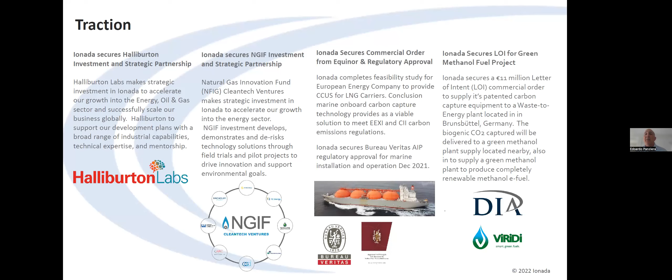But we also have other groups, including renewable fuels, where we use, for example, direct air capture, as well as other technologies to produce renewable e-fuels. But today's presentation, we're going to focus on onboard marine carbon capture. We're just going to quickly touch on the marine regulations. I think everyone's familiar with it. We know that they're driving the change in the industry. We'll talk about the market drivers, why carbon capture on board makes sense for the marine industry.

I'm going to introduce our technology, our unique patented technology, which is hollow fiber membrane contactors. That's a technology we developed initially for marine for desulfurization, and now we're able to use that same technology platform for carbon capture. That allows us to definitely leapfrog many of our competitors and have a mature technology that'll be ready for the onboard marine carbon capture market.

We're going to go into two case studies. The first is with short sea shipping, coastal vessels, where it makes a lot of sense. And Nikos alluded to that. One of the issues we have is with storage on board. So for shorter sailings, it makes sense. And then we're going to talk about LNG carriers, where the energy balance, and obviously with steam-driven ones, the high CO2 emissions have a very quick payback in that case.

And then I'll provide some references as well on projects we've worked on in the past in terms of developing the technology. Why we're here today, we're here obviously to talk about the greenhouse gas emissions. We've all collectively agreed we're going to reduce those emissions by 50%. The switch to renewables is not enough, especially for industries that are difficult to abate, such as the marine industry. If we try to electrify a vessel that goes from Shanghai to California, the battery pack would be larger than the cargo hold. And that's a big challenge, not just with electrification, but with hydrogen and ammonia.

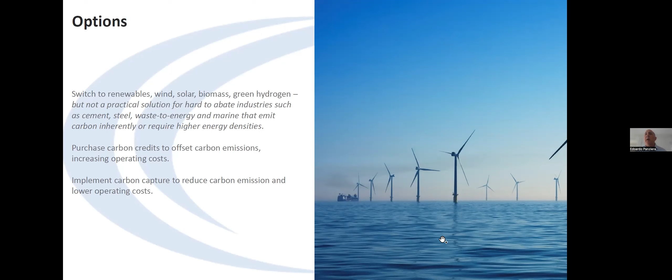Ship owners have two choices. They can either install some sort of onboard carbon capture or pay increasing carbon taxes. And today's presentation will focus on how onboard carbon capture can help reduce your compliance costs. We see carbon capture as part of a whole plethora of unique tools available to the ship owner.

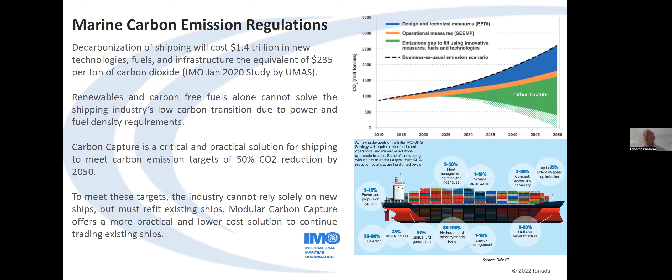There are improvements, and many of the ship owners have already implemented these reductions. For example, speed reductions to reduce greenhouse gas emissions, hull coatings. These are all great, but they're going to get us about 15 to 20% of the way there. If we're going to hit our 50% targets, we believe you need some sort of onboard carbon capture. And that's what we're going to talk about today. Obviously, the legislation is driving this. It's ever changing. I won't get involved in that, but there is a history of these changes.

But what's unique about this industry now, I was also in the desulfurization industry. Desulfurization was really driven by the fuel costs. In this case, it is the Poseidon principles and the charterers. Companies like Cargill, ADM have all made pledges to carbon reduction. And now they're turning to the ship owners and asking, what are you going to do about reaching our target objectives? So it's really driven by the charterers, not necessarily by the ship owners.

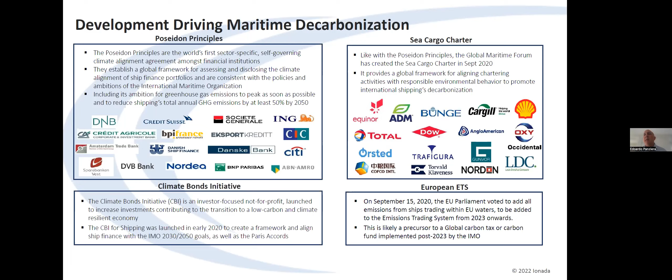And what we see emerging is, obviously, as the technology emerges, our technology and our competitors', the cost of carbon capture continues to fall. We also see, through the EU ETS and other global taxation, the cost of carbon pricing increasing.

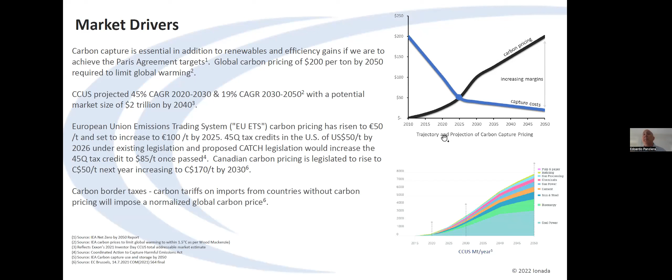Vessels that trade within the EU are going to be included in the EU ETS, and that's going to have a significant impact on the operations. And when the carbon pricing exceeds that of the carbon capture cost, we see a break-even point. So our vision or anticipation is within the next 5 to 10 years, we're going to see an inflection point where it makes a cost-effective business case to be able to do carbon capture on board. And this represents a $2 trillion market potential for carbon capture.

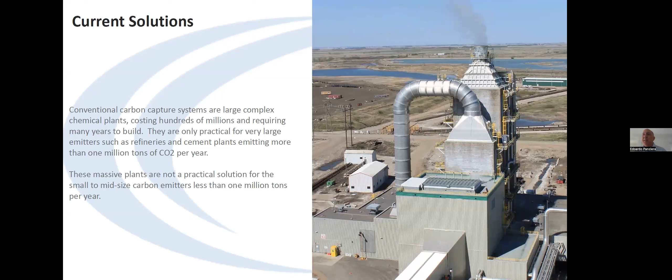Our competitors' technology, people who are familiar with carbon capture know these are very large facilities. They're typically doing 1 million tons and above of CO2 per year. They're $200-300 million. They take about 8 years to build. It's simply not a practical solution to have a 35-meter tower installed on the aft of the vessel. These typical towers need to be plus or minus 1.5 degrees, and that's not very applicable for marine application.

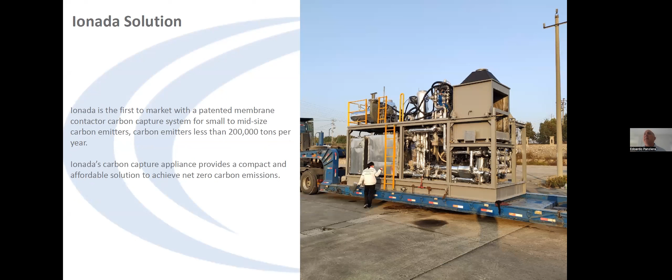In contrast, our technology, hollow fiber membrane contactors, allows us to shrink the technology down and marinize it. On the right here, we have an example of a small scale EOR carbon capture system. It's 500 kilowatts, but does show you how small it can get. This is for China Oil Field Services for offshore application, but does show you how small the technology can be compared to conventional carbon capture systems.

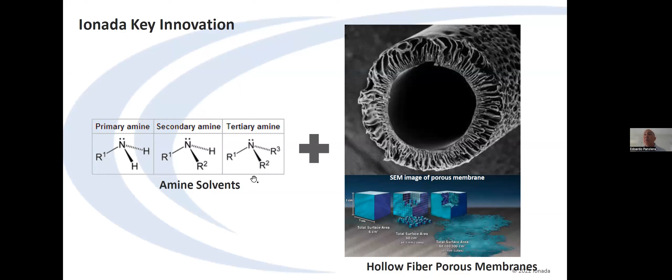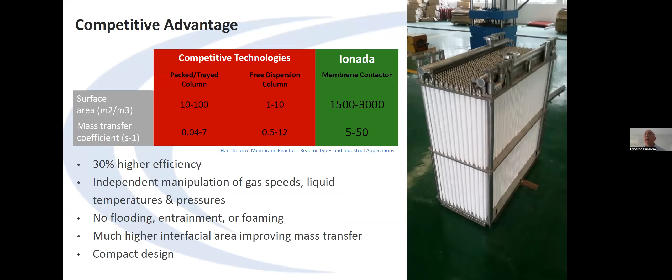Key here, I'm not going to focus on the technology, is we have these hollow fiber membrane contactors. They have a very high TRL level. We combine that with proven amine solvents. They've been in the business for 70 years of doing carbon capture. The key here is we have a very high surface area per unit volume. This allows us to shrink the size of the absorber, gets rid of a lot of moving components, and turns the carbon capture from a chemical plant into an appliance you can plug into your engine and filter out the CO2.

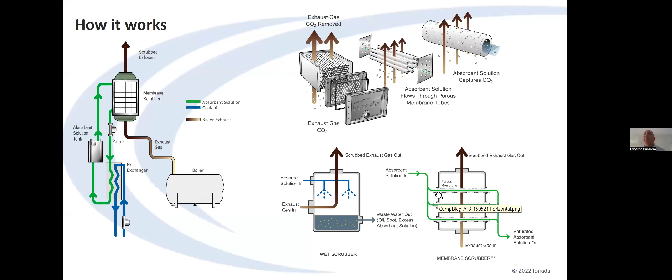How it differs fundamentally is wet technology, for example, wet scrubbers or packed beds, spray or atomize those solvents. Instead, we use these membranes to be able to capture and sequester that CO2. That's a very key attribute to our technology. The process flow diagram is quite simple. We take the exhaust gases, we pass it through the absorber. This is a regenerable process. We load up these amines, we strip out the CO2, and then we can store it as a liquid on board.

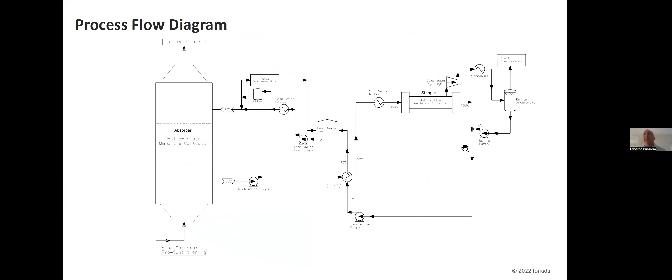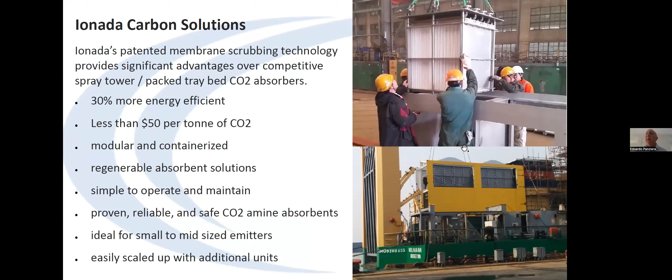What that means for our technology is more efficiency. That reduces the cost of carbon capture. We're able to modularize and containerize the system, which allows us to really quickly deploy it on a vessel, reducing the dry dock and retrofit costs. And we're using proven reliable solvents. Our technology has been proven initially for desulfurization. Now we're applying it to carbon capture.

What does this look like? This is our standardized modular system, 20,000 tons per year. That corresponds to about 85 to 90% carbon capture on a 4 megawatt engine. We're going to see an example later on for short sea shipping, where one of these arrays of 3 40-foot high cube containers is able to capture up to 85 to 90% of the CO2. It consists basically of an absorber, so the exhaust gases from the main engine pass over the absorber. We have a stripper that strips out the CO2, and then we compress and store the CO2 on board. I haven't shown the CO2 tanks because obviously that will differ on the application.

But the key here is that these 3 40-foot high cube containers could do 25% of a 16 megawatt engine. Why would you want to do 25%? Well, if you need to achieve an EEXI or improve your CII rating by, let's say, 20%, then one of these units on a 16 megawatt engine would be able to get you compliance. If you want to do 85 to 90% carbon capture, you would have 4 of these units. That modularity allows us to scale up quickly to do anything from 4 to 16 megawatts. The OPEX will vary. We have here basically $18 to $46 per ton, and we'll explain that in detail, but it's about a 5% increase in your fuel consumption.

So if you're running this system just like a wet scrubber, you have an increase in engine load, and that corresponds to about 5% penalty. But if you look at the cost, for example, at 100 euros a ton, you're disposing the CO2 for 30 euros a ton, there's a 70 euro delta, and that's the payback, and that's the business model. And this typical unit uses about 400 kilowatts, and that's to run the compression system. So it's a quick note on the carbon capture technology itself.

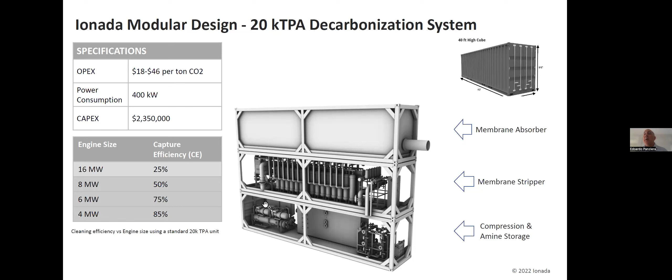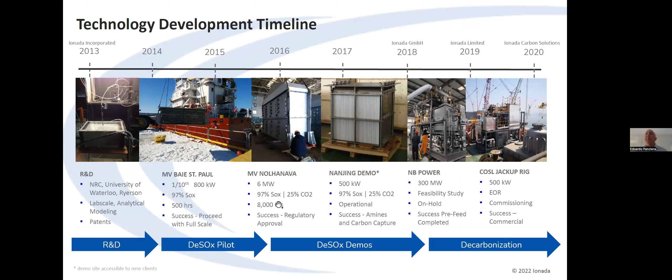Company itself, as I mentioned, we developed the technology. We have Bureau Veritas approval initially for desulfurization technology, and now for the carbon capture version. We've run over 8,000 hours of the membranes on a ro-ro vessel, the Nolhanava, and this gives us a proven platform to be able to launch into carbon capture for marine vessels. We have a broad patent portfolio that protects the technology as well.

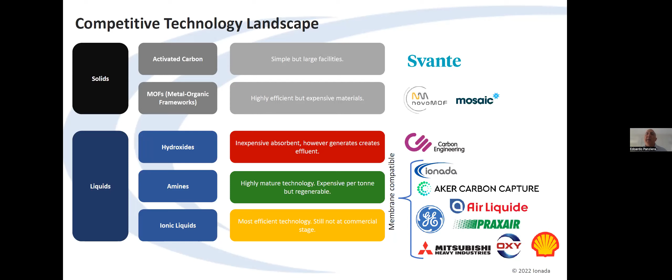We're not alone. There are many competitors on the market. Many of you are aware of companies like Mitsubishi, Air Liquide, Oxy, Aker Carbon Capture. But our key differential here is that the Ionada membrane technology, which is modular, the key challenge there is we double the size, we double the cost. And there's a break-even point, about 200,000 to 500,000 tons per year, where you're better to have a customized, tailor-made solution using traditional carbon capture systems.

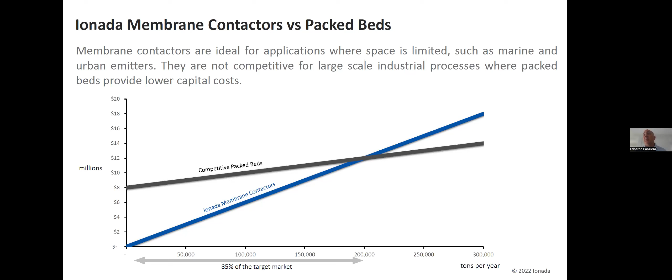But for marine vessels, they're all well below 200,000. That corresponds to about over 100 megawatts. Most marine vessels are between 20,000 to 100,000 tons per year. So definitely an advantage for our technology. It's also a much smaller scale, which makes it much easier to deploy on the vessel. So how we position the technology is we have the highest rate of return and lowest CapEx in the sub-200,000 market, which is what the marine sector is.

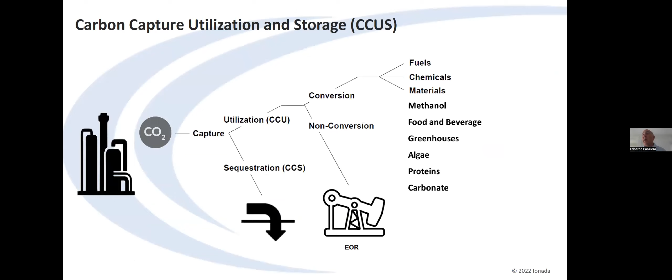One question that often comes up is, what do you do with the CO2 once you've captured it? We're going to talk about hub and clusters for sequestration. In the US and Canada, we look at EOR, but we also have an emerging market where we take the CO2 that's captured and produce renewable natural gas or methanol. So that's a key advantage to carbon capture, is there's a future value on that CO2.

The Northern Lights is a great example where we see the hub and clusters being built out. You have these anchor tenants such as Norcem that are building out this massive infrastructure for CO2 and CO2 transportation. Well, this allows us, for example, for marine industry to be able to leverage these infrastructures, be able to then offload the CO2 into this pipeline network. And this allows vessels that come to shore, for example, the Porthos project in Rotterdam, any vessels trading into Rotterdam would be able to unload the CO2.

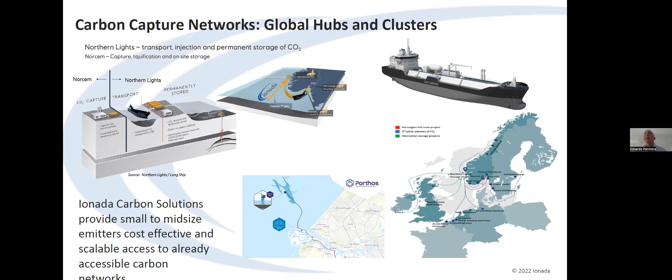And that's a key parameter we need to look at in terms of adoption. As the land-based systems build out this highway of CO2, the marine industry will be able to take advantage of that as well to dispose of the CO2. But let's get into specifics here and look at some examples.

The first is with Grona Shipping. It's a short sea shipping. They deliver wood pellets from Eastern Europe to Copenhagen. In Copenhagen, they run, for example, a biofuel power generation. So that's net zero, their energy production, but the transportation is not. So they're willing to pay a premium for the transportation of low carbon or zero carbon. They've already looked at LNG as a way of getting 20 to 25% CO2 reduction.

And now with carbon capture on board, we'll be able to achieve 100% net zero transportation. And that's really something that a charterer, in this case the power generation, wants to pay for. They're providing higher charter rates, longer terms. The financing itself qualifies for EU financing at 2.8% over 7 years. And that's a significant advantage that shifts the economics from being, let's say, 5 years in the future to being economically sound today, because the charterer is willing to pay a higher premium for that application.

In this case, it's about 3 to 4 megawatts, and we're able to do 85 to 90% carbon capture on board. We received our approval in principle for the project in December of 2021. And this project is a great example where the vessel only sails for 3 or 4 days.

So we're able to store the CO2 on ISO tanks, and be able to very easily offload that in a regular routine in terms of the shipment.

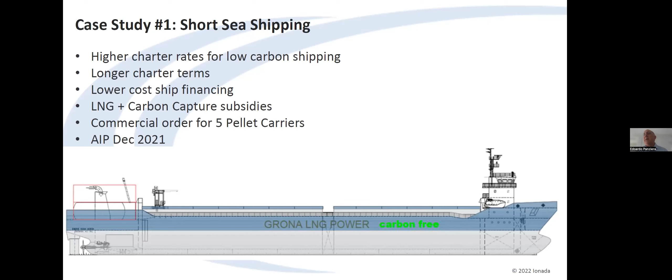That's one of the issues we talked about, the challenge of onboard storage. These short sea shipping coastal vessels are ideally suited. In the case of electrification, anything more than 2 days doesn't make sense, but these vessels sail for 3 or 4 days.

That makes it a good business case for onboard carbon capture. The second application I'd like to talk about is LNG carriers. Many of the older vessels are steam driven and have a challenge with the EEXI, since their CO2 emissions per ton are much higher than other vessels or other combustion type engines.

These vessels are also ideal because they have very high quality LNG flue gas, which is high temperature. We can use that waste heat to regenerate the amines. We also have a cryogenic cooler, which is the LNG, to liquefy the CO2. That provides a big advantage to look at this application, or any other LNG application, for onboard carbon capture.

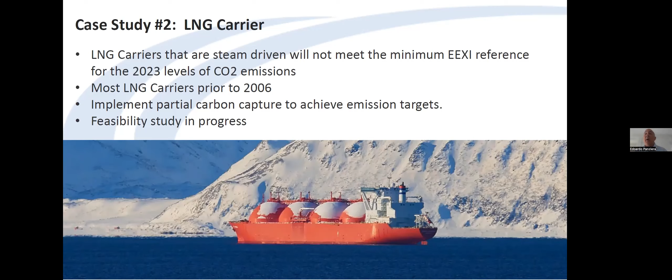What does that mean? If we look at the EEXI, the vessel is currently at 11.5. It needs to get down to 7.7, and that's a 33% reduction in CO2 to comply with the EEXI.

Now, there's a boil-off factor that may be able to adjust that. But even with the CII, there's a challenge on these vessels, and also with other types of vessels, such as bulkers and container vessels.

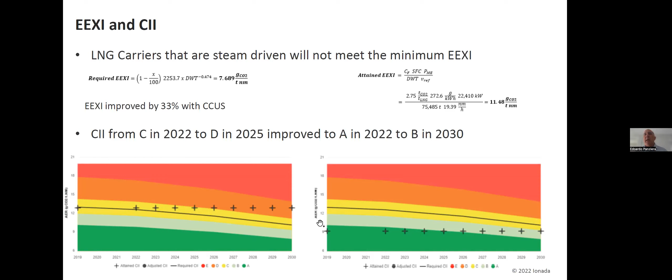The advantage of doing partial carbon capture, let's say 30% on board, is we're able to shift, for example, from a D to a B, or a D to an A. This allows us to be more compliant, and that's a big advantage that we discovered with this feasibility study we conducted with this energy major. Onboard carbon capture is not only viable, it makes a strong business case.

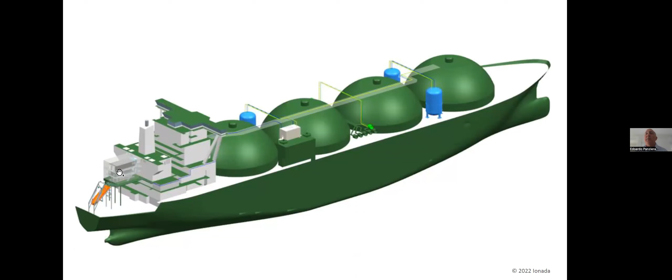It looks very much similar to a backpack you would install on, for example, a wet scrubber. In this case, we have 2 of our 20,000 ton per annum units, so a total of 40,000 tons per annum. This could do up to 75 tons per day of carbon capture.

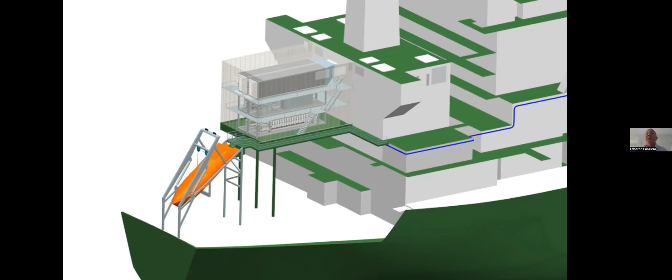This allows us to bring the EEXI into compliance and dramatically reduce the CO2 costs. In this case, the vessel trades from Norway to Spain carrying LNG. Even at 30% carbon capture, the savings per year under the EU ETS is $3 million. Even if we factor disposal costs of 30 euros per ton, we're still saving 2 million euros in carbon taxes.

And that's a big advantage. This is what the technology looks like in terms of the delivered package. We have the carbon capture equipment, which is on the aft of the vessel. We have the storage tanks, and we have a discharge system.

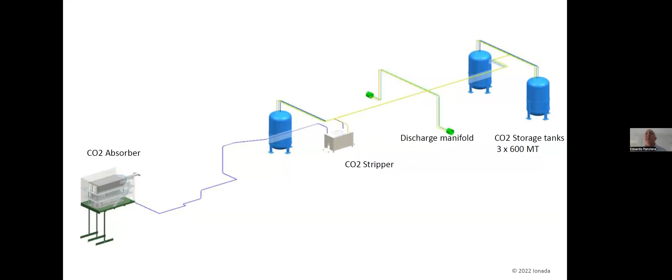In this case, the advantage of this vessel is it comes into Hammerfest. Hammerfest has, for example, a facility for LNG and also has an acid gas well, so we can actually discharge the CO2 in Hammerfest. That's a big advantage in this case, where we have a built-in way of getting rid of the CO2. But I think it was very important.

One of the key findings in our feasibility study for the energy major is that if we look at all the different methods to achieve the CO2 targets — biomethanol, green ammonia, or even just paying the carbon tax — using conventional fuels in combination with carbon capture provides the lowest cost of compliance. That's a key finding from our feasibility study: once we factor in the cost of carbon capture, it's still much lower than paying the carbon price, and significantly lower than switching to ammonia or biofuels.

At the end of the day, the regulators regulate emissions. They do not regulate fuels. And our vision is that onboard carbon capture provides the lowest cost of compliance to achieve those CO2 reductions.

I've left examples of the projects here as well, but I'm going to skip down, as I'm running out of time, for some Q&A.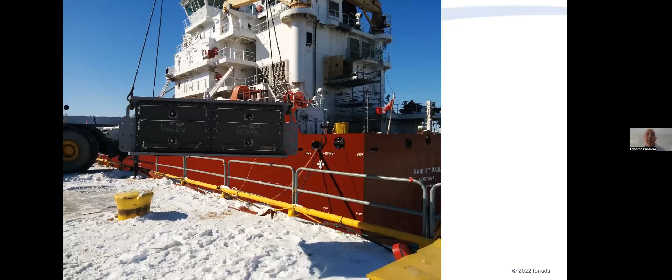Thank you very much, Eduardo.

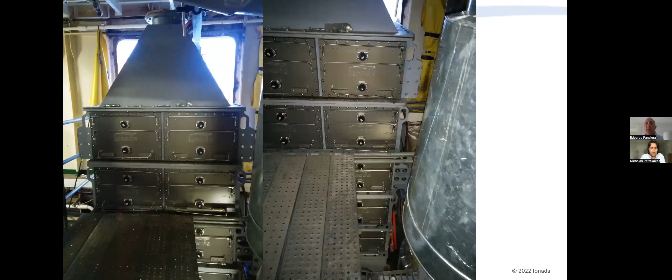You covered a little bit on the cost difference between the alternative options, and I tried to mention at the beginning that some of the issues we have between hydrogen, ammonia, methanol in terms of storage is what carbon capture has. How would you say, where does carbon capture play a role in this?

If we're targeting about 30%, in almost all the feasibility studies we looked at, whether it's an LNG carrier, bulk or container vessel, 30% doesn't affect the stability of the vessel. And that brings us into compliance for the CII. So if you're looking at your fleet of vessels and you have a challenge with EEXI or CII, in our opinion, retrofitting the vessel with carbon capture is the easiest and most economical solution.

Right now, there isn't a supply of ammonia or hydrogen, so that's off the table. Even if we compare it to biofuels and methanol, the cost of compliance is still much lower by simply doing onboard carbon capture. And once again, the caveat there is you often need to be trading, for example, in Northern Europe, where you have access to be able to dispose of the CO2.

And at least for methanol, I guess you need CO2 in order to create the green methanol anyway. Correct, might as well make it come from your solution.

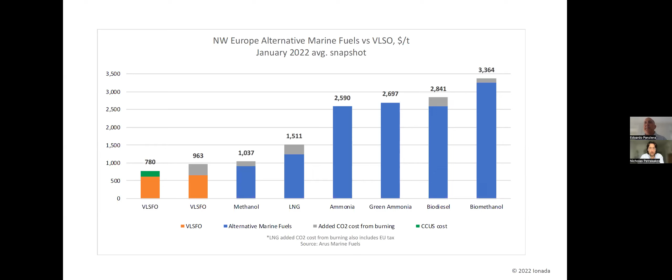I guess open loop scrubbers faced some criticism in the past for on the SOx side. Your original scrubber design was a dry scrubber, so you didn't have that. How would you say the carbon capture side of things will face criticism potentially, and how do you get around that? Yeah, obviously this is going to follow the same paradigm that we had with desulfurization.

Nobody wanted a wet scrubber, but the economics are there, and we're going to see that happening. I believe my vision of the future is we're going to see basically two different charter rates: vessels with onboard carbon capture that have a better green rating and a lower cost, and vessels without. So for the ship owners that want to make the investment in the added equipment, their benefit is they're going to be able to charter for a wider range and for longer and better terms.

And we see the same happening initially with the LNG carriers. Already, some of the older vessels that are going to come off charter will not be charterable because they won't meet the new regulations. So the ship owners have a choice to make that investment in the technology or face the fact that they're going to have lower rates. So we see that kind of emerging, and that will drive the adoption, just as we saw with wet scrubbers.

You're on mute, Nikos. Sorry for that.

Thank you, Eduardo. So one key point that you brought up is the modular nature of this. Obviously, that solves some aspects in terms of how it works with the lenders. You can actually lease this equipment and turn it into OpEx instead of CapEx. And you have a solution for that. Do you want to talk about that?